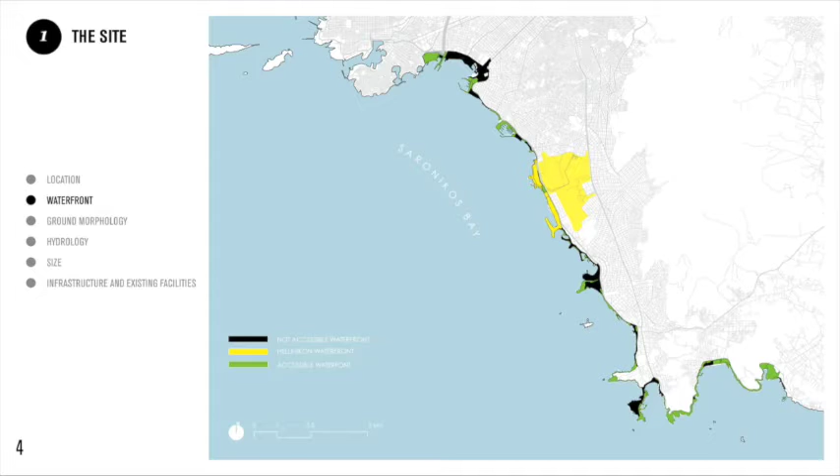Hellinikon is 1 kilometer away from the foothills of the Hymettus mountain, and before the construction of the airport, natural streams used to cross through the site.

Hellinikon covers an area of 600 hectares, and it is as big as Masdar City and has twice the size of Central Park. In order to get a sense of scale, this is Hellinikon, and this is how it would be if we pasted Barcelona's fabric on it, and it would be home to 80,000 people.

Finally, serving both as an airport for more than 60 years and a large venue for the Olympic Games of 2004, Hellinikon has inherited an important infrastructural stock, including terminals, hangars, and decommissioned sporting facilities.

The site was inaugurated in 1932 and was expanding in size and cycle of operations ever since. One key moment to the expansion of the site was the construction of East Terminal building by Saarinen.

And in the early 90s, the airport reached critical capacity and it had to be relocated in the east of Attica. Since that time, Hellinikon had been closed permanently for the public, except during the Olympic Games of 2004, when it was transformed into one of the largest venues in Athens.

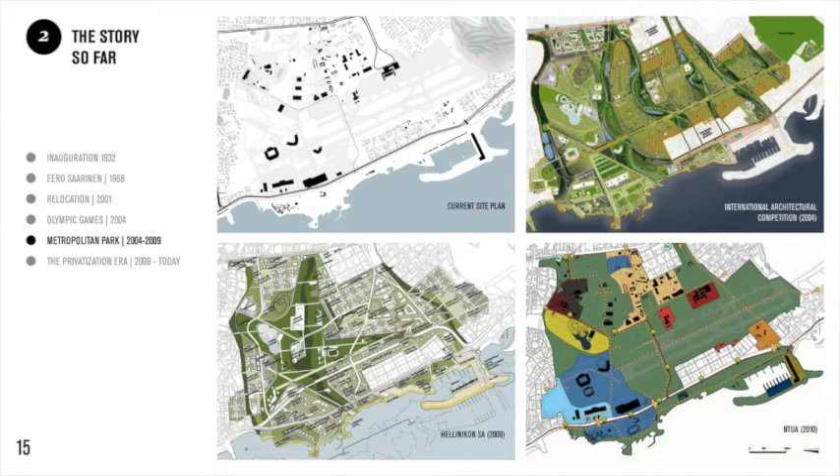But even before its closure, there had been a great debate about the future of the site. Numerous studies and international architectural competitions proposed several alternatives, with the dominant idea being a large metropolitan park.

However, all plans stayed put when in 2008 the crisis hit and Hellinikon was included first and foremost in the long list of privatization that had as a goal to cover the huge national debt. And as a matter of fact, a couple of weeks ago, Hellinikon was sold to a Chinese-Greek investment conglomerate.

So the privatization of Hellinikon comes at a very awkward moment for Athens, because, as you may have heard, the Greek economy is not doing great lately. As a matter of fact, we're not alone. Most of the southern European countries are struggling with a humanitarian crisis that is deeply rooted in economic recession, corruption, and unemployment.

On their effort to transcend economic recession, central governments are treating the public urban space as a mere vehicle for economic growth. And what that practically means for the urban space is the implementation of those typical tactics of capitalist urbanization, like relocation of undesired population and activities, deregulation and privatization of the public space, safeguarding of private investment against the interests of local communities, and generally the promotion of a civic structure that is socially exclusive.

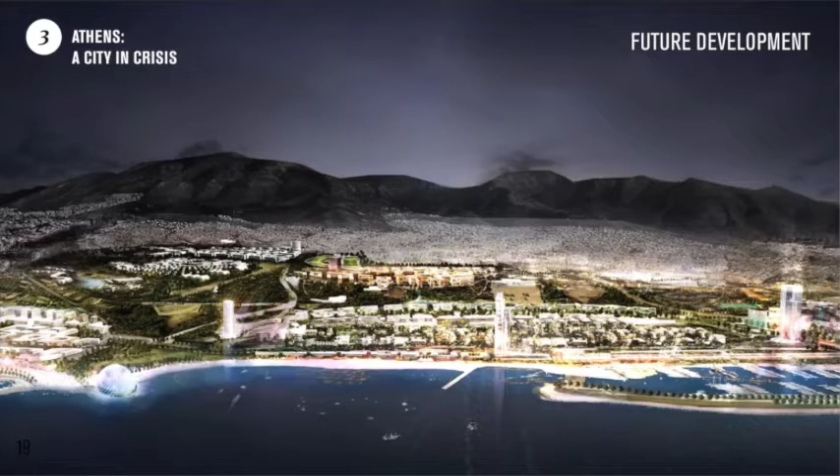That is exactly what is happening in Hellinikon today. So the new owners of the site have promised luxurious housing, malls, casinos, marinas, and lakes. So what is wrong with that? Well, let's start with the numbers.

Mostly because of Greece's weak financial standing within the global financial market, and because of an obscure privatization process, Hellinikon was eventually sold for only $1.2 billion, which covers a minor part of the $470 billion national debt. On top of that, the Greek state committed to constructing supporting infrastructure that will cost almost 2.5 times the total revenues from selling Hellinikon.

So even by standard privatization criteria, this is a very, very bad deal.

But leaving those considerations aside, the presence of a high-end new urban development does not address the current social and demographic issues in Athens. First of all, a new urban development will crush the already collapsing real estate market in Athens. It does not address the demographic decline happening both at a Greek and a European level, and most importantly, it doesn't address urgent social issues like unemployment, homelessness, and an abandoned downtown Athens.

So all those facts are telling a story. They're saying that what is responsible for the urban crisis in Greece is not only the financial and demographic decline, but also the fact that new urban developments are not able and not willing to address those urgent social needs.

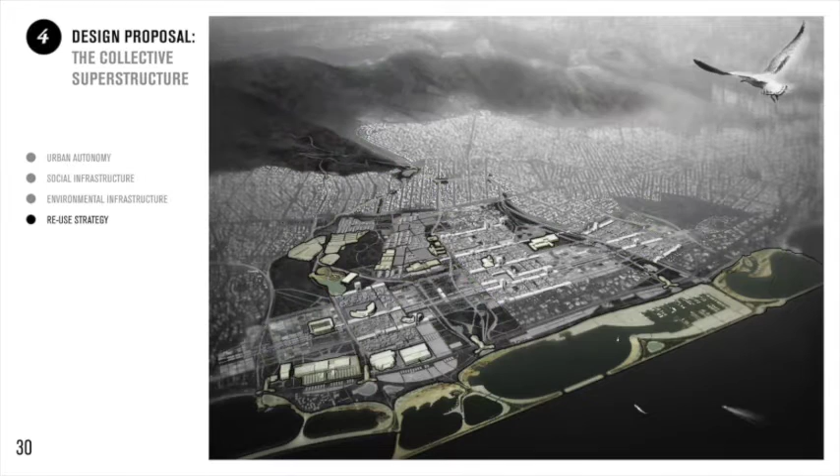Now, the structure of this proposal has four parts: urban autonomy, social infrastructure, and environmental infrastructure, and the re-use strategy, which I will not cover here.

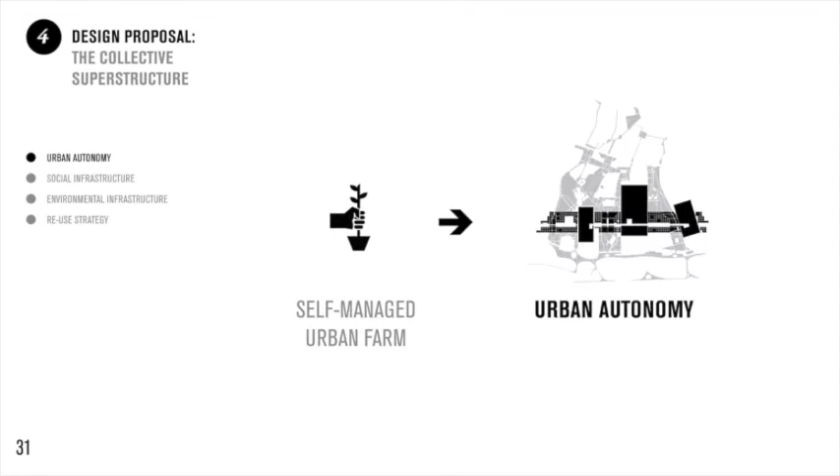So this project pushes the idea of the self-managed urban farm to the concept of a new community whose size and shape will be based on the capacity of a given land. The agricultural production is the symbol behind the autonomous character of the collective superstructure.

The production is centralized along the agricultural belt, which is a strip of land alongside the former runway, and its role is to provide the necessary food for the survival of the community.

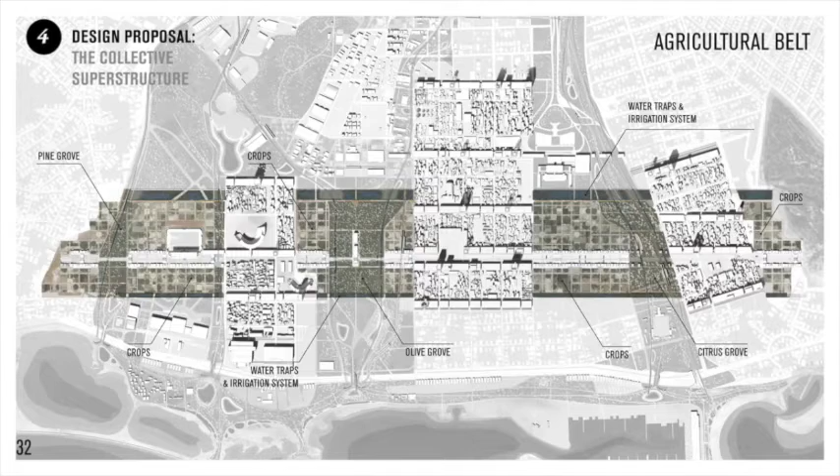The urban patches are the urbanization vehicles of the new community, and they are city sectors defined in size and shape in order to control growth and achieve overall self-sufficiency. These proposals suggest the deployment of 3 urban patches that allow for a community of 7,000 people to be entirely self-sufficient on fruits and vegetables.

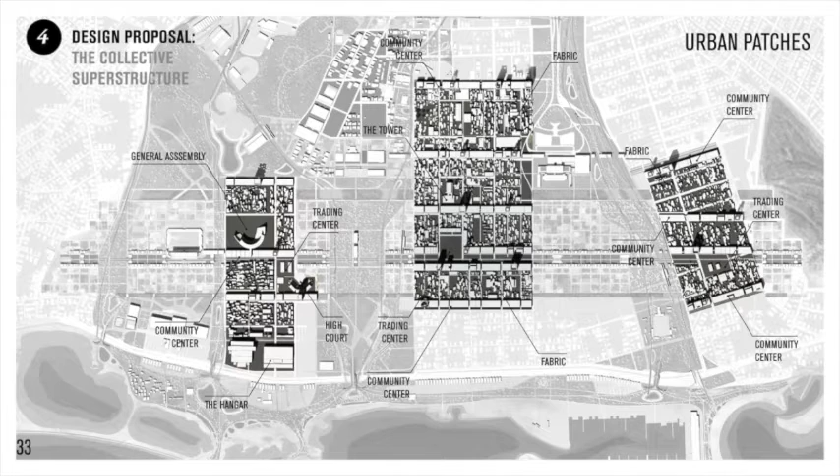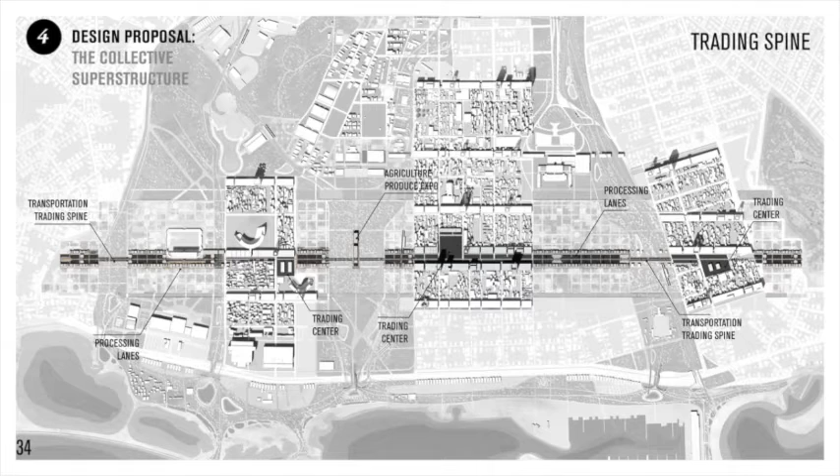Finally, the 3 patches are connected through the trading spine, which makes creative use of the old runway in order to establish a central venue for social and economic interaction. Now, the Metropolitan Community Clinic that I presented before proved that even during a crisis, basic social provision is still possible with collective and voluntary work.

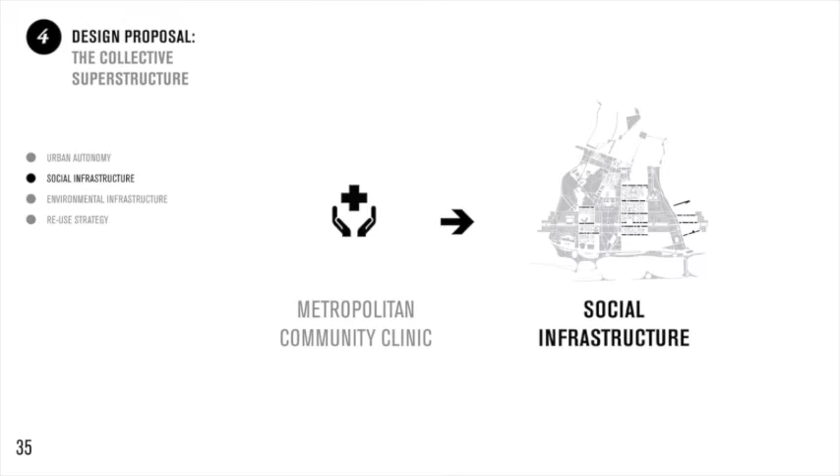With this as a starting point, this project envisions the expansion of this social model at an urban scale, where have-nots not only obtain access to medical care, but also housing, employment, and a safe urban environment. The community centers are key components of the social infrastructure.

Those are linear structures built perpendicular to the direction of growth, and their role is to provide incoming settlers with basic amenities and define the general urban form. The way they do that is by establishing a water management system.

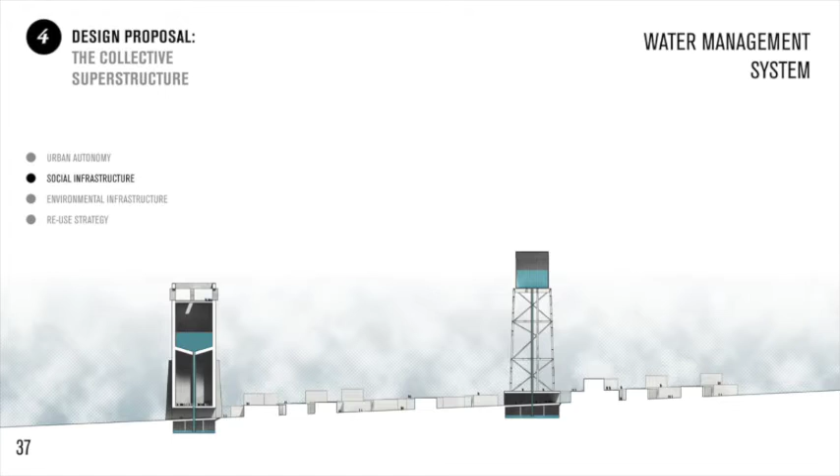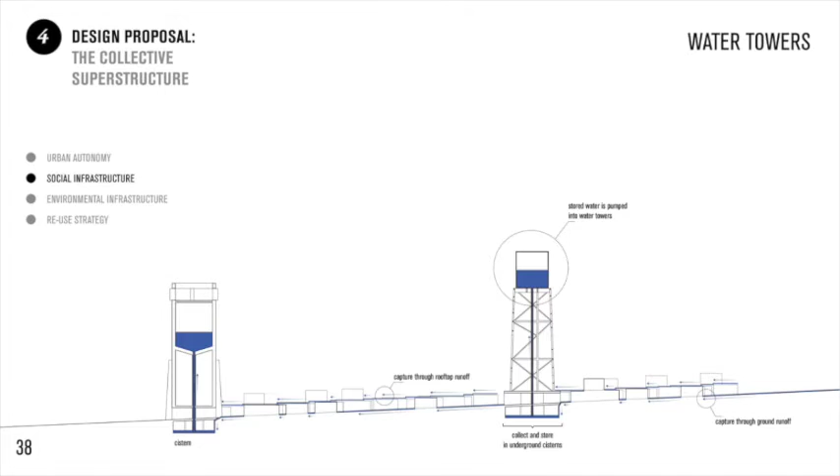The foundations of the community centers are used as underground cisterns that collect and store surface water runoff. The water is then pumped to water towers that maintain pressurized water for distribution across the community. Each community center also holds the necessary civic amenities like markets, schools, and manufacturing lanes.

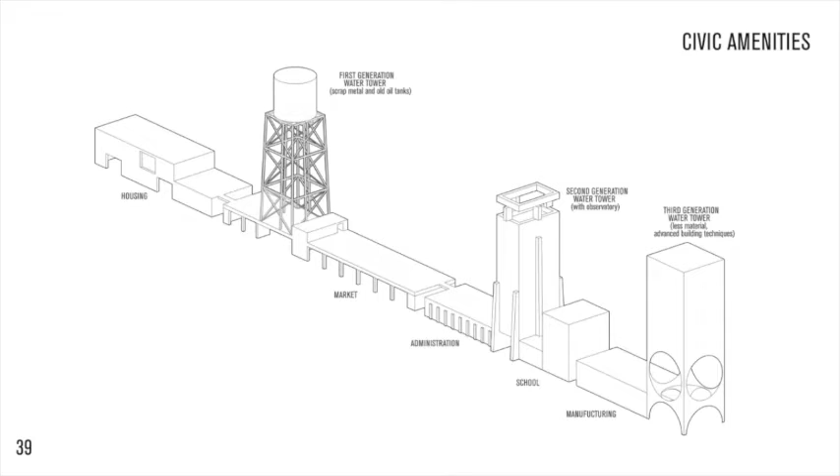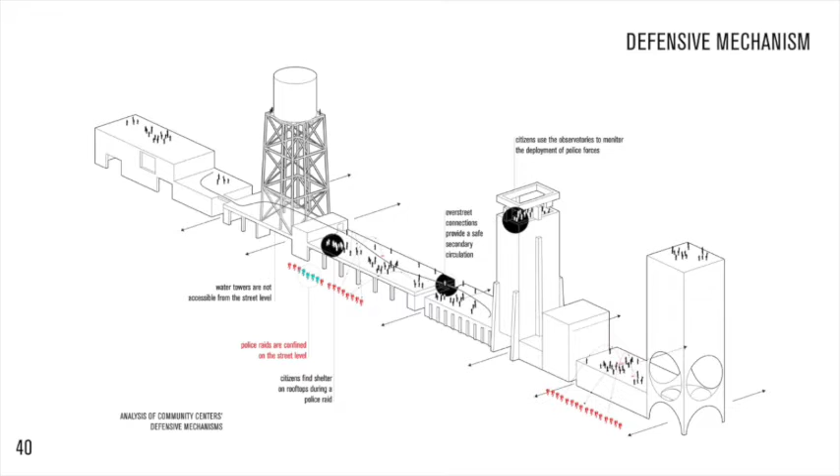Finally, the structure of the community centers provides a defensive mechanism against eviction-like practices from aspiring investors or even the state itself. For example, interconnected rooftops can be used as a secondary pedestrian network, while water towers can be used as observatories, like here.

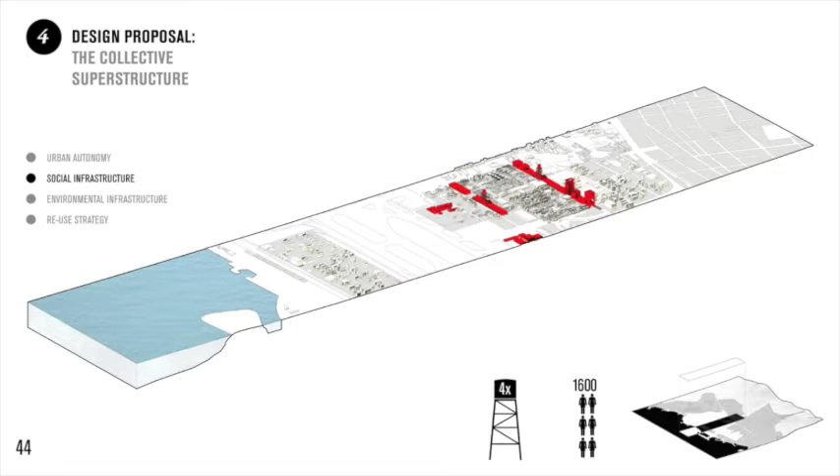Now, here is an example of how the urban patch grows along with the deployment of community centers and the incremental addition of water towers that define both the shape of the city as well as its size and capacity in population.

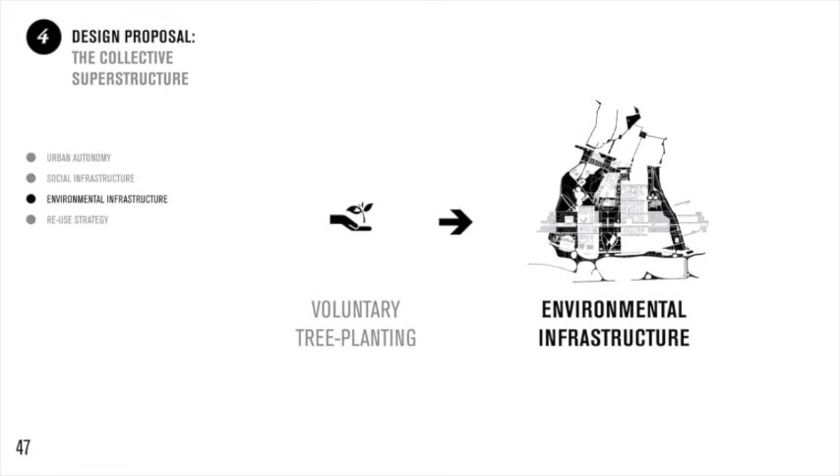Now, the ongoing voluntary tree planting, together with a self-managed urban farm, expresses the public demand for more green open spaces. This project claims that the long-anticipated metropolitan park can actually be possible through the coordinated continuation of these efforts.

The landscape strategy is driven by the intention to reconnect the mountain to the waterfront, and it has a dual purpose: to provide the community with the necessary natural resources for its self-institution, and secondly, to give back to the city a truly open metropolitan park and waterfront.

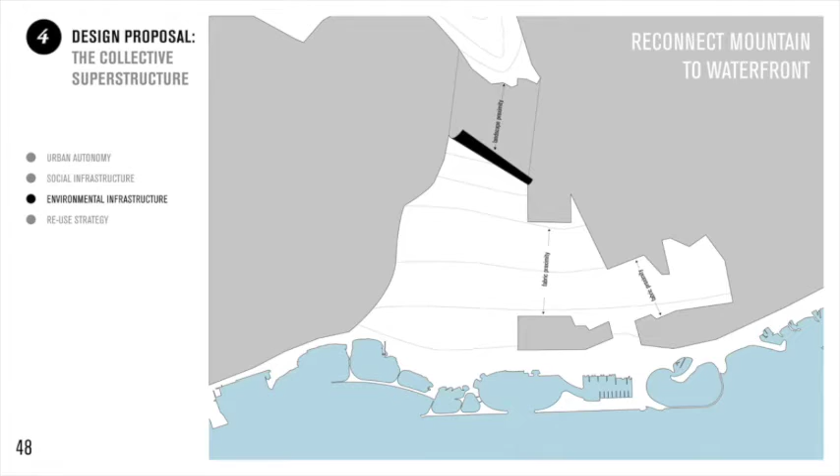The strategy is divided into 6 sectors, which fluctuate from a naturalistic mountain park to landscape corridors running through the urban fabric, a large-scale metropolitan park, the agricultural belt that I presented before, a buffer park, and the waterfront.

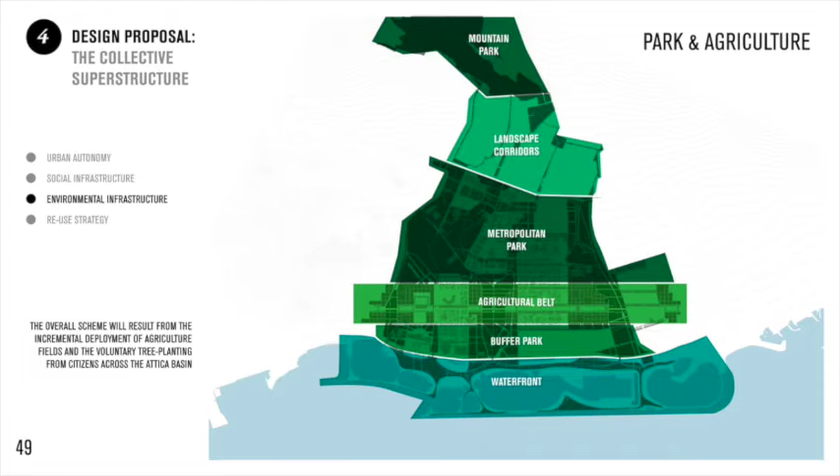Also, due to the very dry climate of Athens and the excessive impervious surfaces of the old airport, there needs to also be a water management system that can collect, store, distribute, and purify water.

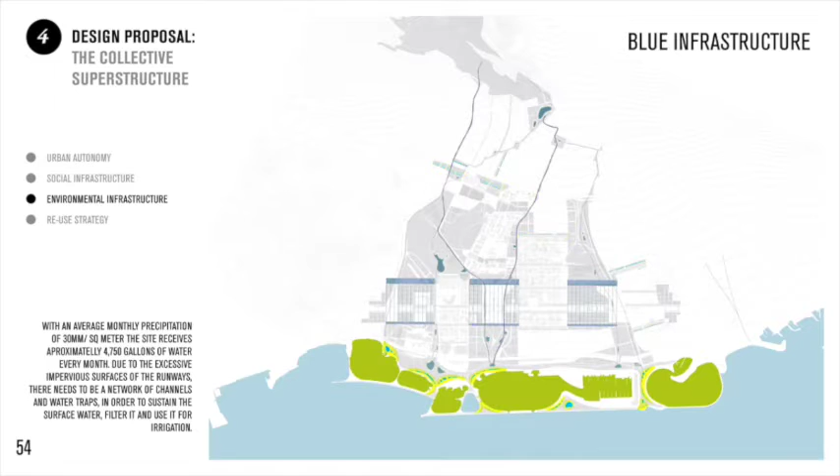Now, through the Aviation Museum, the former employees of Olympic Airways paved the way for a fertile reuse of the former airport's existing infrastructure. And due to the limited resources of a community like that, this logic will need to be generalized.

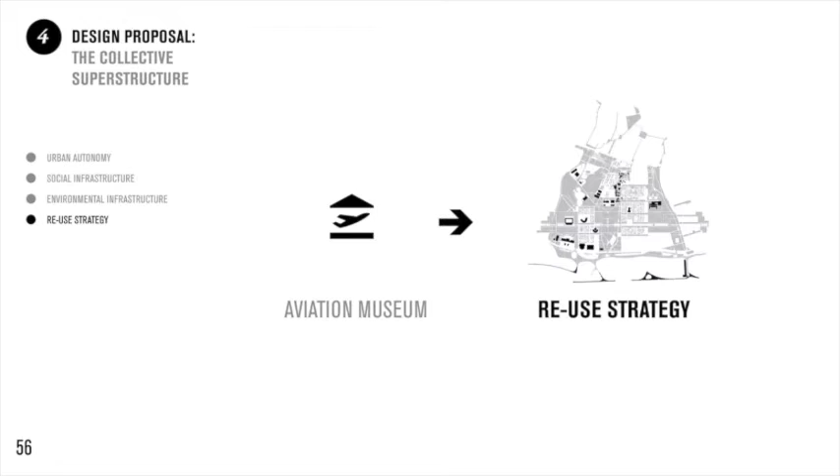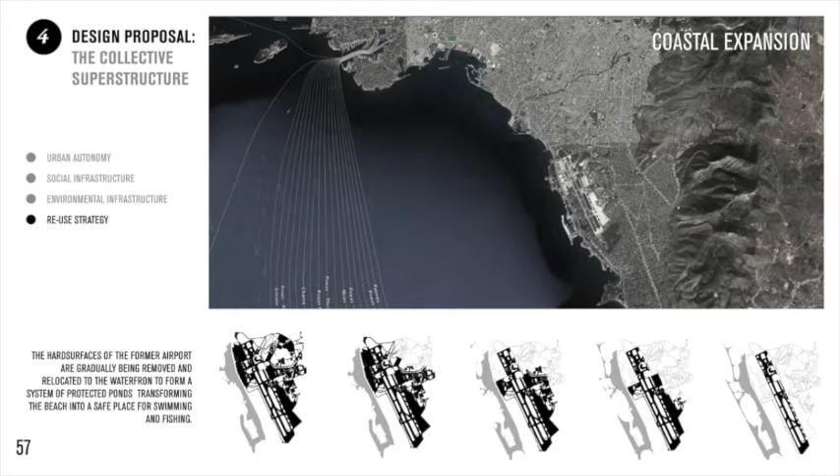Now I will briefly present two strategies of the reuse strategy, and the first is the waterfront. As you can see on the diagram below, the hard surfaces of the former airport are gradually being removed as the community grows, and relocated to the waterfront in order to create this system of protected ponds that transform the coast into a safe place for recreation, swimming, and even fishing.

On this map, you can see the existing transportation infrastructure of the site. On the north, with the grey dots, the 2 metro stations, and along the coast, the tram station. And this is the existing...

...railway of the tram. What this project suggests is the extension of this tram line to connect all the stations between them, and of course, the trade spine that I presented in the beginning that establishes a domestic transportation network that serves all 3 urban patches.

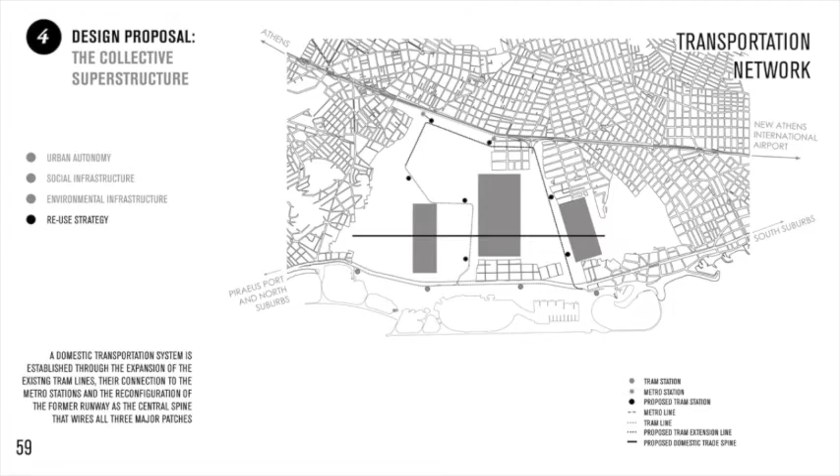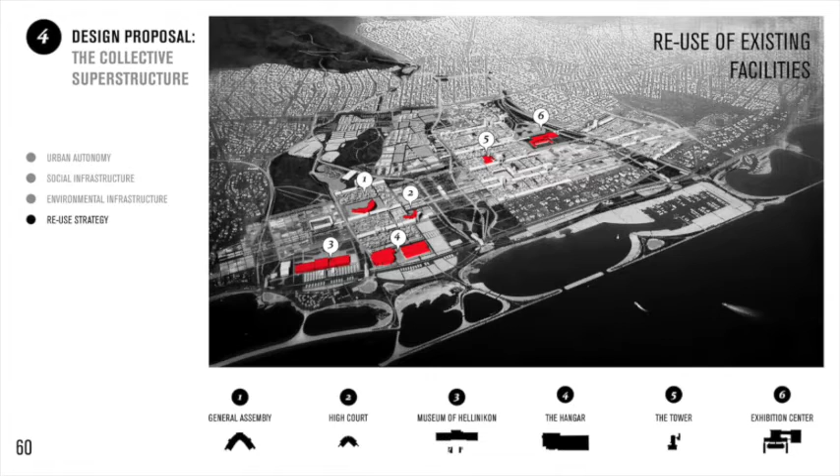Finally, this is a simplified diagram of how existing facilities could be repurposed for the needs of the new community. Like old baseball stadiums could be the new General Assembly buildings, the hangar could be a big cultural event facility, etc. And of course, the Saarinen building, the exhibition center, which is something that runs through all the proposals for Hellinikon that have been submitted up to now.

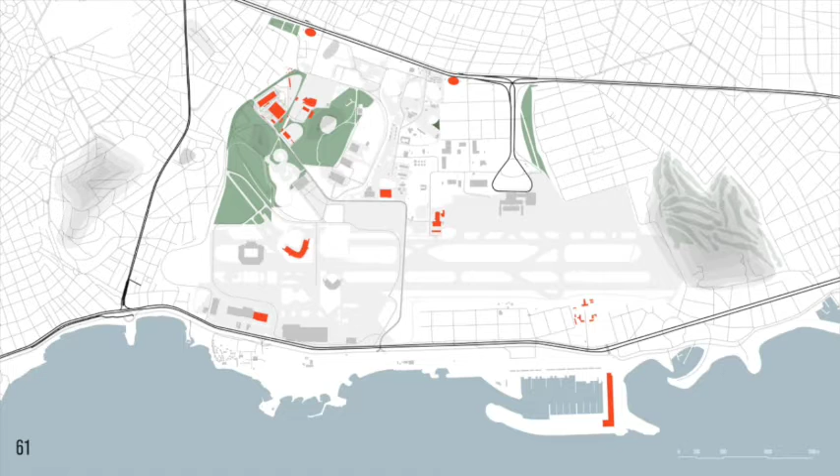Now, before closing this presentation, I want to really quickly show you how this community could be established and grow. So, with red indicating what is active—actually it's not very visible on the screen—but in the beginning, settlers would occupy existing fabric on the north of the site, where now it's a former...

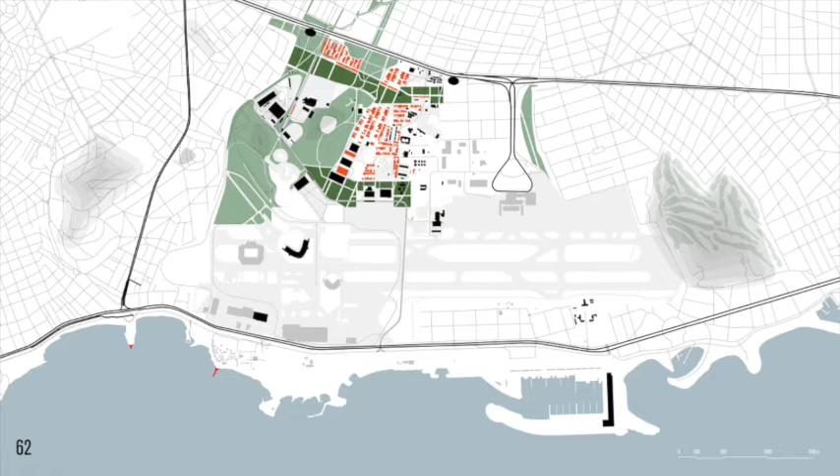...decommissioned military base. And when the building stock depletes, squatters will move to the interior of the site, establishing the first community centers. And as the community grows and as the patches densify, the individual agricultural production will shift towards the agricultural belt.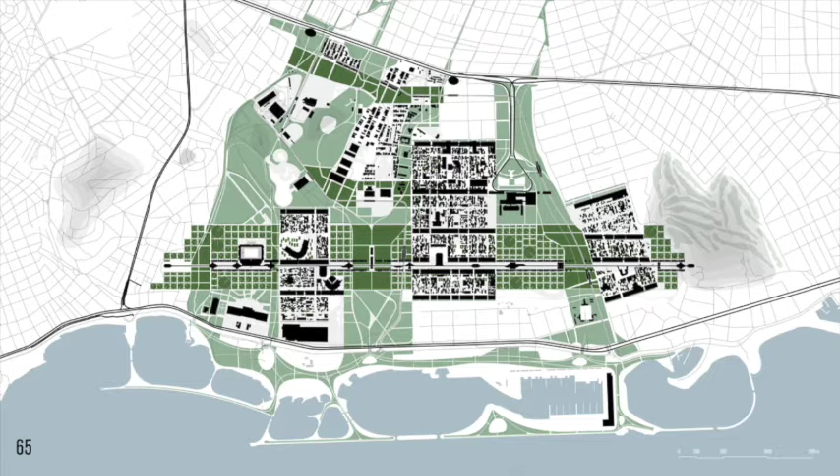And when the community reaches its maximum capacity and the waterfront is complete at the south, this is when the new community enters its steady state phase.

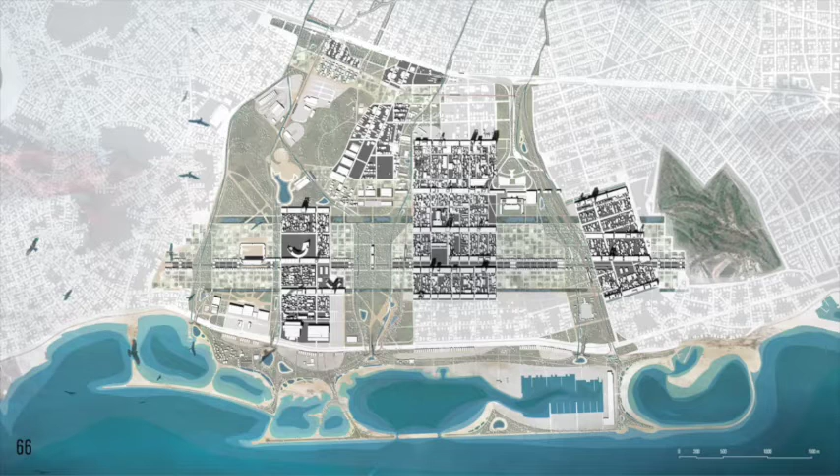So what I presented may sound like a utopian scenario, but it may as well resemble a not so distant future. What I want you to take from this presentation today is that the use of prime urban land can no longer be a vehicle to generate profit and distribute it to the people, because that model has failed us in the past.

I believe that the post-crisis era should signify a holistic turn on how we perceive urban space and spatial justice. Thank you for the attention.

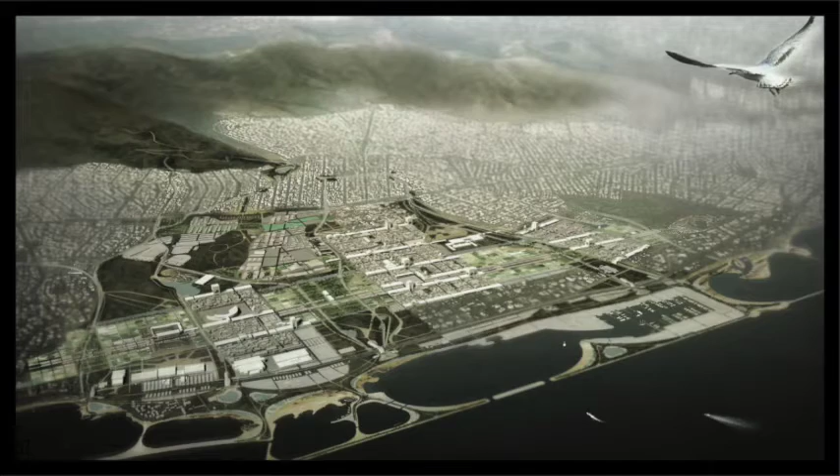This paper, Negotiating Public Spaces in the World City, Nation and Global as Overlapping Spaces on Tel Aviv's Shoreline, examines negotiations for social inclusion as they are manifested in bodily urban design and regulatory urban planning of Independence Park, the main gay cruising site in Israel, before and after its dramatic redesign in 2009.

Independence Park is discussed here as oeuvre, or work of art, following Henri Lefebvre's influential understanding of the city as a spatial and social product formed as a result of human relationships and conflicted interests over it. Negotiations over the park as oeuvre proved transformative for the agents involved.

An outcast community of global characteristics gained acceptance into national identity. A peripheral city gained the status of global city, and a nation-state critiqued for violating the transnational value of human rights gained credibility as gay rights tolerant.

This case study is therefore unsettling for the sharp distinctions of the spatial categories state, city, and global that we have come to consider as alienated and competing, as suggested in analytical categories like the network society, the global city, and the queer nation. Independence Park, the main homosexual cruising site in the Tel Aviv metropolitan area and in Israel at large for the past five decades,

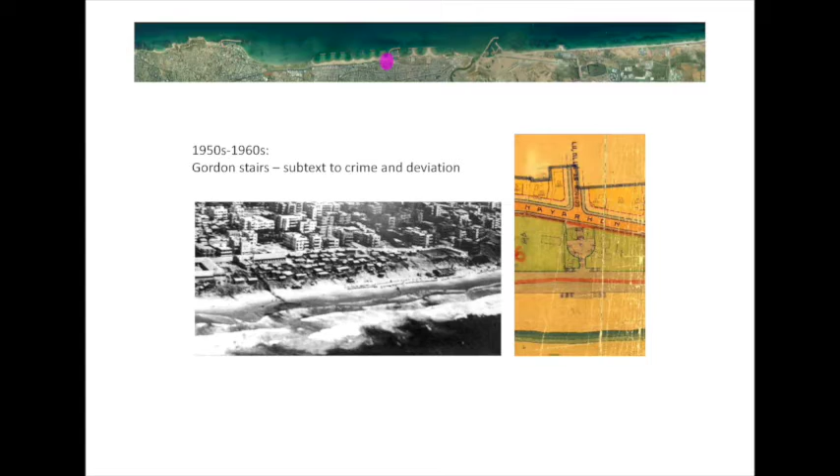And in the 50s and 60s, a bit northwards at the Gordon Stairs, which was kind of a shanty, shack area, and it was subtext to crime and deviation, until cruising moved to Independence Park in the 60s.

Allocated in Sir Patrick Geddes's celebrated master plan for Tel Aviv of 1925, Independence Park was to serve as the city's main urban park. Yet it housed a British Army camp till 1948. The park was named after Israel's 1948 coming of statehood, reflecting the sense that a city's large urban park is not only of the city, but also of the nation.

The shift in park use involved the construction of the Hilton Hotel in its center in the early 60s. The political and economic significance of the Hilton in the global context of the Cold War enabled Hilton representatives to claim this public park by applying pressure on the city via state government.

While closed for construction, the park drew cruising activity pushed north from Gordon Stairs, and when it reopened, the park was already recognized as a site for sexuality, and the public refrained from using it.

Independence Park served as a main gay cruising site for 5 decades. While serving a number of activities including activism and socialization, it was arguably shaped by the fact of its 24/7 use for explicit sexual activities.

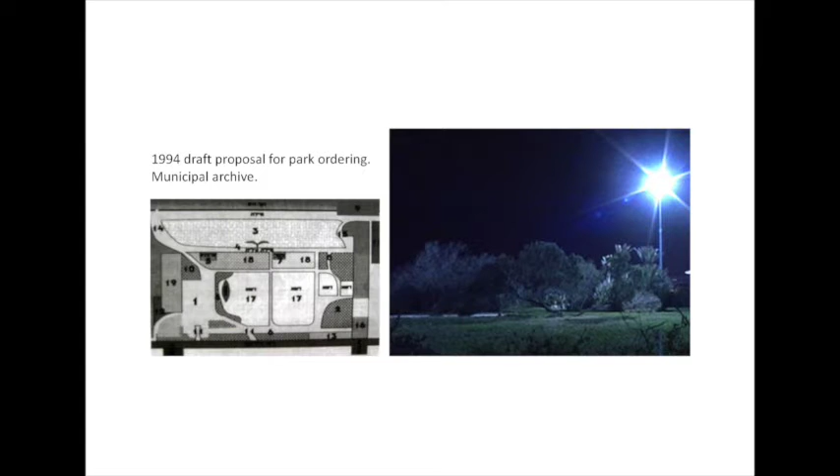The city responded in attempts to drive cruising out by closing down the public toilets, installing high voltage lighting, like in stadiums, trimming the dense bushes, and several urban planning schemes intended to open the park and limit its use for cruising.

Yet, unlike the quiet folding down of cruising activity before, attempts to drive out cruising from Independence Park in the 90s were faced with strong opposition by the now organized gay community.

Struggles over the park required the community to organize and politicize, electing gay representatives for city council, entering legal suits against the city and the police, and organizing public protests against attempts to clean the city out of homosexuality.

Political activity in defense of the park as territory generated impressive public consensus that homosexuality is indeed part of the city and Israeli society. Tel Aviv embraced the global nature of gay identity and community in its attempt to brand itself as a global city, a space of flow in the network society.

The city invests great efforts in celebrating its gay-friendly global identity and in attracting global gay tourism. This is the gay tourism page on the Tel Aviv official website, and there are all kinds of events like painting pedestrian crossings rainbow, and this is not photoshopped.

Over the years, homosexuality has been acknowledged as a legitimate variant of the Israeli, even by such homophobic institutions as the Israel Defense Forces. This is the former Facebook page of the IDF from Gay Pride Day last year.

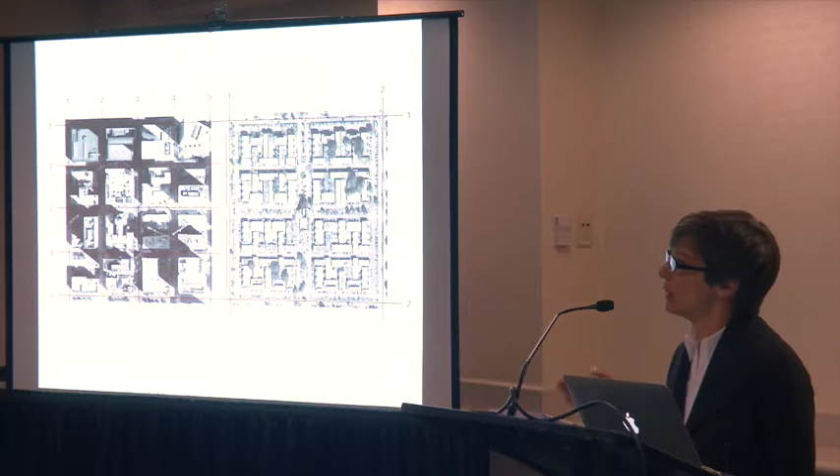It's, in most cases, very small. And where there is green space, it often doesn't belong to anyone, so it just kind of leaks out and nobody claims it, and so it's not well used. We've seen it with the kind of funny apartment buildings where nobody owns the property.

It's the same thing that happened in public housing when we built the towers. This shows downtown Houston at the same scale as a single complex. You can see that 16 downtown blocks would fit in that one complex.

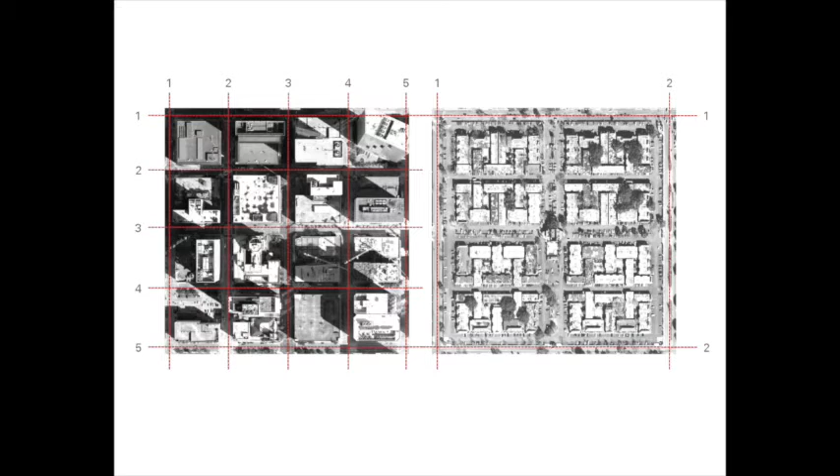There's also this question of—this is a typical multifamily housing complex in Houston from the 1970s. The complexes, the way they're working and the way they were intended to work, weren't intended for people to organize, to have a civic life, or to be part of a strong community. Does that make sense?

These are for people who are going to live here when they're young professionals, and then they were going to move out. But this is all changing.

One of the things I was really interested in is how do you get that sense of ownership and control in a place that you're renting, which is very difficult in the United States, and how do you get a sense of spatial agency—what can people do to create change? That's what I'm going to try to talk about today.

So here's just, I wanted to zoom in and show the scale. Gating is everywhere in 1970s apartments in Houston. There's not a single one that's not gated, and no one's going to be the first one to take it down, which is, I think, a problem.

I want to talk a little bit about housing policy—how did we get here? In 1937, the Wagner-Steagall Act was passed, creating the first opportunity in the United States to build public housing. In 1949, the Housing Act was passed, which meant we actually would build public housing, and we did.

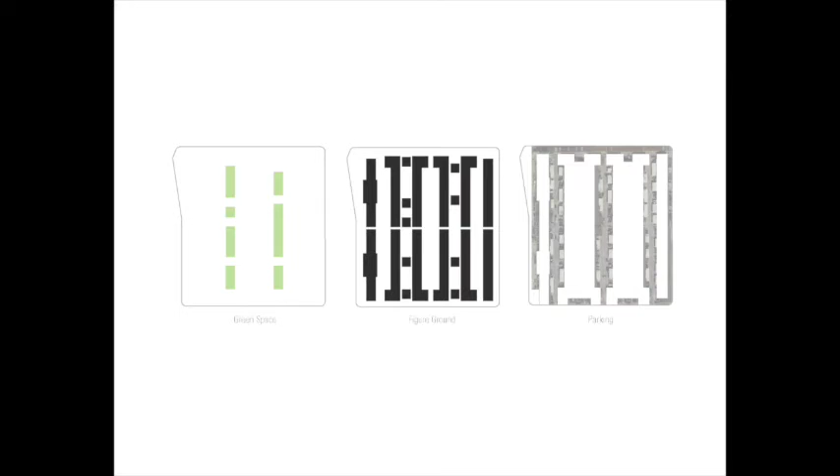So here's the pattern of courtyard, building, and parking. There's very little open space, and I have to say that Gulfton probably has the least open space of any neighborhood in Houston. 30 acres for about 70,000 people. It's pretty horrible. So kids play in the courtyard about 40 feet wide, baseball, whatever.

Some courtyards are fenced, others are not, as you can see. So I think that...

The whole idea is that, for me, StCloud is a place that is working. And it's not working because designers have interfered. It's working actually because the community has kind of come together and made it work for them.

One of the things that's happened is that the management company is supporting it. There's also 2 community centers in vacant apartments, and one of the things we're finding is that more and more community organizations are moving into complexes like they moved into the inner city in the 1960s and 1970s. Does that make sense? Nonprofit organizations providing after-school programming, language classes, so on and so forth.

So I want to talk just a little bit about Taiwan Village. Taiwan Village is on the way to Hobby Airport in South Houston. Taiwan Village is a little bit different than StCloud in the sense that the folks who live there own their units. $5,000 to $10,000 is their appraised value, each unit.

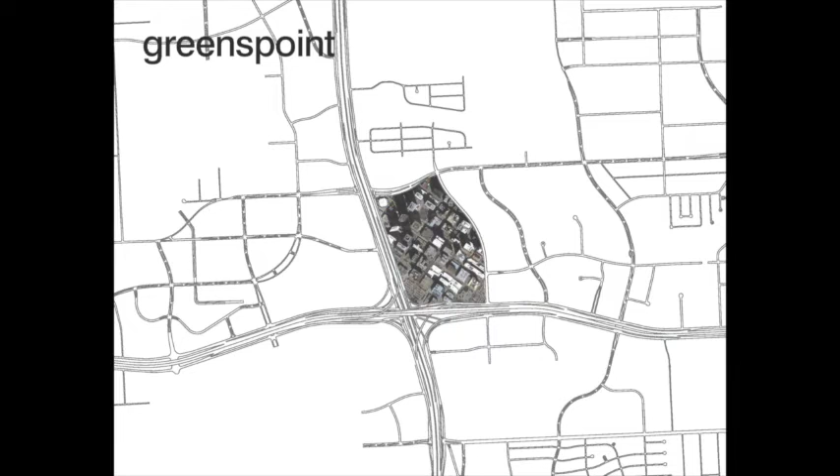So with that, I'm going to talk about Greenspoint. I loved your map with Barcelona in it. This is downtown Houston in one block in Greenspoint, just so you can see the scale of the neighborhood. Greenspoint has 11,000 apartments. One guy, Steve Moore, I call him the fixer, owns 25% of all those apartments, or 2,700 units. I'll talk about him a little later.

In 1990, Greenspoint had 2,500 people under the age of 18. By 2000, that had gone up to 12,000. By 2010, it had gone up to 14,000. That's a fact of how many families are now living in 1970s apartments, because no other buildings have been built in Greenspoint. 36% of the population are children. The poverty rate is 36% in the neighborhood. In many of the complexes, it's hovering around 50%.